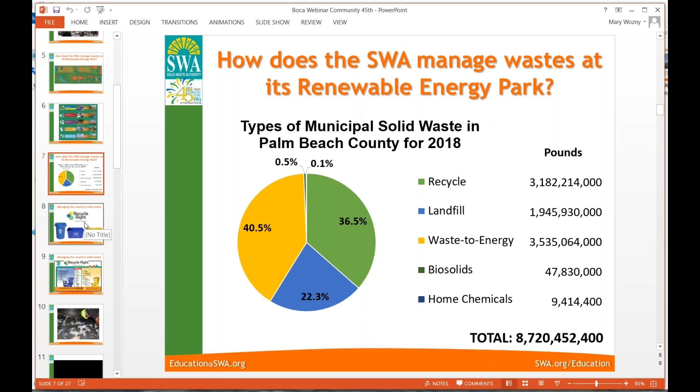So we're going to start by talking about recycling. Recycling is really important, and we have a pretty unique system. I mentioned we're dual stream - that means we have those 2 bins, that blue and yellow bin, and the whole purpose of that is to keep our contamination levels low.

So the blue bin, that's things that might have had food or drink in them, usually those types of containers. And the yellow bin is for your paper material, your cardboard. As a side note, if you guys don't have your blue and yellow bins at home, please give us a call or go to our website and you can request them and we will drop them off for you for free. But now we're going to get into what goes into each bin, because this is where we get a lot of confusion, and a lot of people wish-cycling, where they just put everything into the blue and yellow bins and hope we deal with it. Unfortunately, that doesn't happen. We really need you to recycle right at home to make it more efficient for us and to allow us to do our jobs properly.

So in the blue bin: things like your plastic bottles, your steel cans, your aluminum cans, glass bottles, your cartons - even though like your milk cartons, almond milk cartons, orange juice cartons are cardboard type material, they go into your blue bin because they have that food or liquid in them, and we want to keep our paper clean, not contaminated. So that goes into your blue bin. Drink boxes, not those like Capri Sun pouches, but the little boxes, can go into your blue bin also.

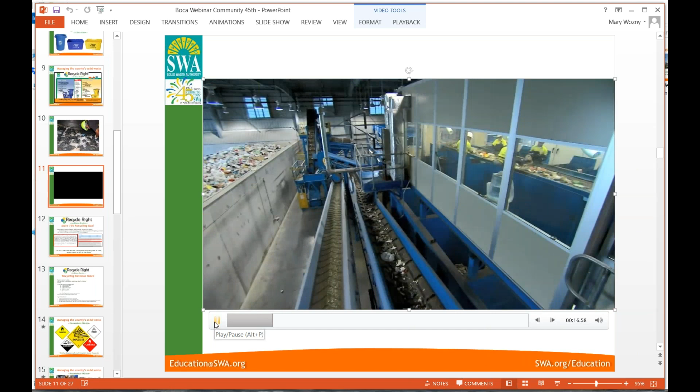So our building is separated into blue and yellow side, just like your bins. We're going to start with the blue side—that's your plastics, your metals, your glass. The first thing we do is pull out ferrous metals, or your steel, with a big magnet. We have people all along the line pulling out contaminants. You can see that again, because lots of people put stuff in their bins that they think is recyclable.

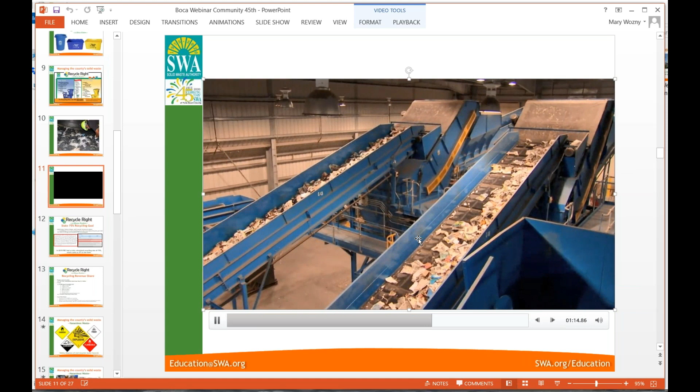On the paper and cardboard side, that's your yellow side, same thing—we have people pulling out contaminants all along the line. The first step we go through is separating the cardboard from paper. It goes across a star screen, and the cardboard dances on top while the paper falls to the bottom. Then we have something called a trommel that will spin out small material we don't want mixed in with the paper that can damage it—stuff like sand, gravel, or little pieces of glass.

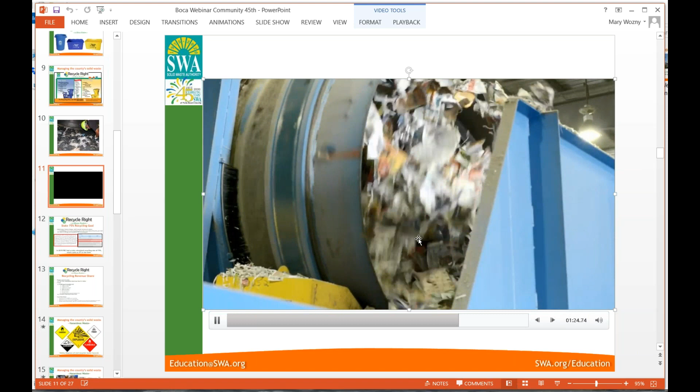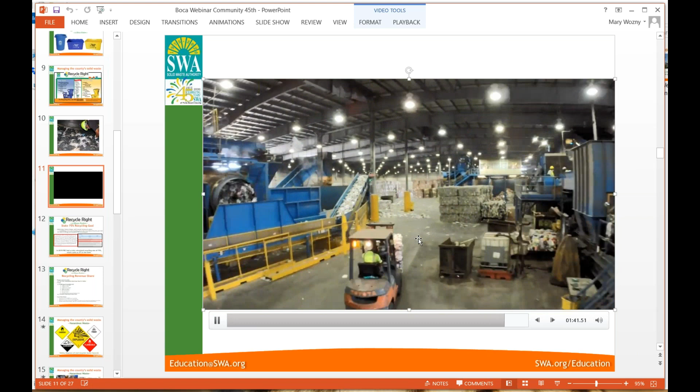We have also seen an increase in the amount of cardboard that we get. That's because it's really easy to shop online—people buy stuff online, it shows up in boxes, and we recycle those boxes. Same thing, we end up creating those bales of your paper or cardboard, wrap them with that steel twine, and then ship them off to be recycled into new materials.

Now, just to give you some more specific information about recycling in Palm Beach County and in the city of Boca. In 2008, the Energy, Climate Change, and Economic Security Act passed, which established a new state recycling goal of 75% to be achieved by this year, by 2020.

Waste to energy is included in that, and we're lucky we have 2 waste to energy facilities, so that increases our calculated recycling rate. As of 2019, Palm Beach County had a state calculated recycling rate of 73%, which is great. It ranks us 4th in the state.

But keep in mind, our population is 1.4 million people, so it's hard to reach that many residents and to calculate that number, because it's not just what we're receiving in our facility, but everything the county is doing. So to get in touch with all those businesses and programs that are recycling to calculate that, it's a really difficult task.

One other program I want to mention is the Municipal Revenue Share Program. The Solid Waste Authority of Palm Beach County started this program in 2010, and since then municipalities around the county have shared more than $9.5 million. The purpose of this program is to reward our municipal partners for the role they play in promoting and supporting our recycling, so the net revenue received from marketing our recyclables, selling them via brokers, is shared with the municipalities after our net processing costs.

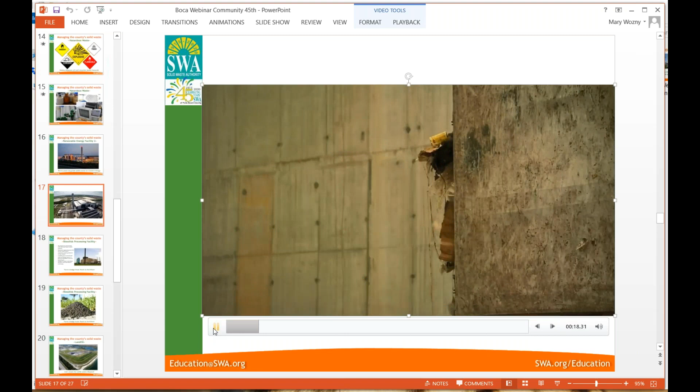First, you'll see those tractor trailers driving up to our tipping floor from the ramp, coming from one of those 6 transfer stations. The truck will push the material out the back via something called a walking floor, so their trucks don't have to tip up, they can just push that material right out into our pit. Our pit can hold up to about a week's worth of Palm Beach County's trash, and the wall on the side where the truck is about 40 feet deep, and across from that is about 100 feet deep. So it's a really large pit of trash.

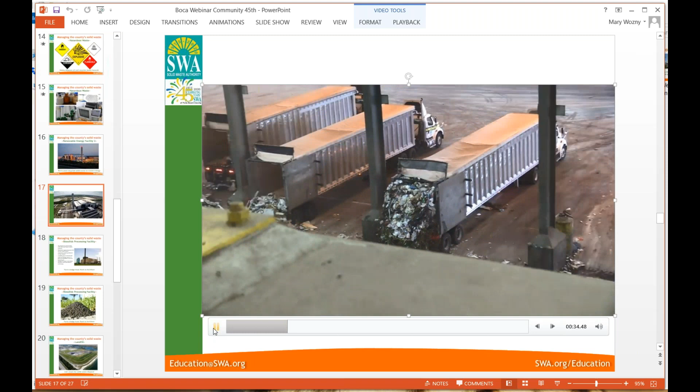In the control room, you'll see one of our claw operators moving one of our claws. We have 3 of them, called grapples, and each claw can hold about 9 tons of trash. Besides the claw operators, we have other engineers there looking at all sorts of data coming in from every point of our power plant, including temperature, pressure, steam, and emissions. The claws are fluffing and mixing the trash, because we want to burn it, and we need a good mix of material in order to do that.

Once they get a good mix, they can hold up to 9 tons of trash. They will move it over to the entrance of our boilers, that's called our hopper. They drop it in very slowly, and that fire burns about 2,500 degrees Fahrenheit.

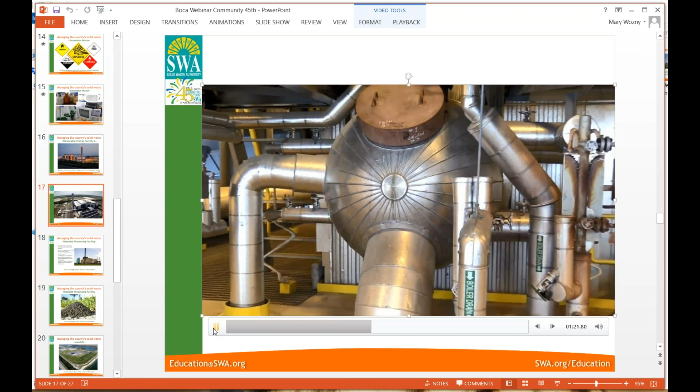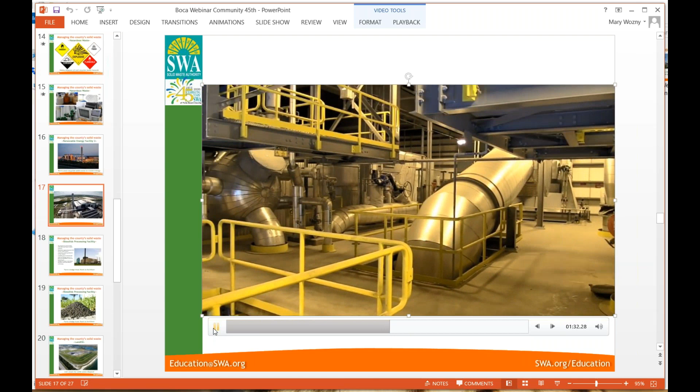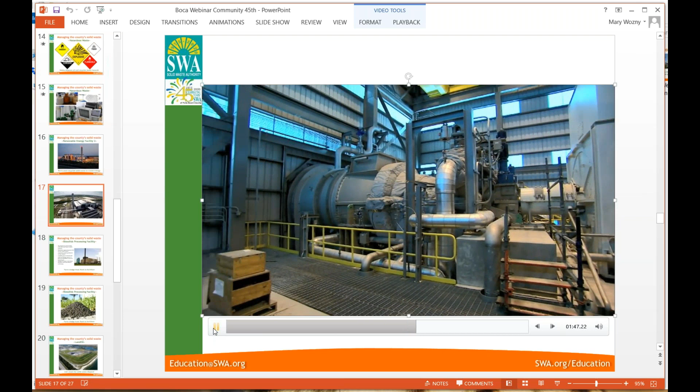The whole purpose is to create steam. Along the walls of the boilers are tubes carrying water, and if it heats up really hot, it turns into steam. That steam gets piped through this networking of pipes into our turbine and generator room. The turbine is the thing to the left that looks like a jet engine, and the blades spin through a rotor into our generator, where we produce enough electricity to power about 70 to 75,000 homes, in addition to all of our facilities on Jog Road.

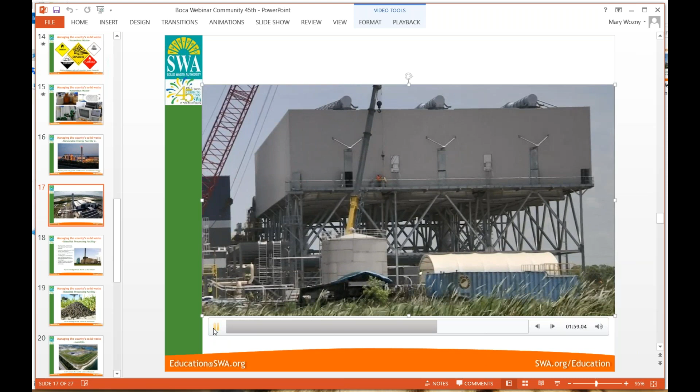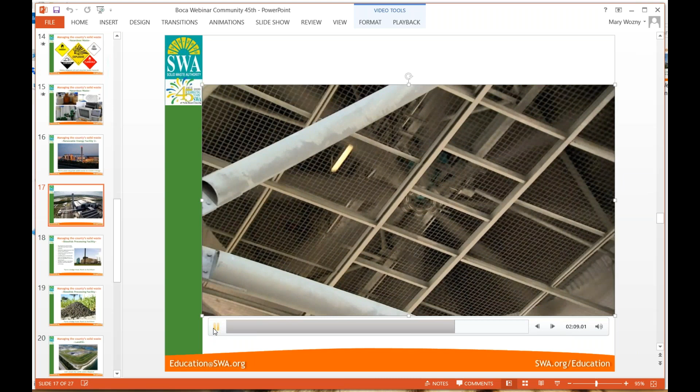Now what you're looking at is the ACC, our air-cooled condenser. We are the greenest facility, so we don't want to waste anything, including steam. So the steam we use to turn the blades in the turbine, we pass over these fans. We have 15 of them, and they're 36 feet across. This cools the steam down back into water, which we can pump right back into our facilities.

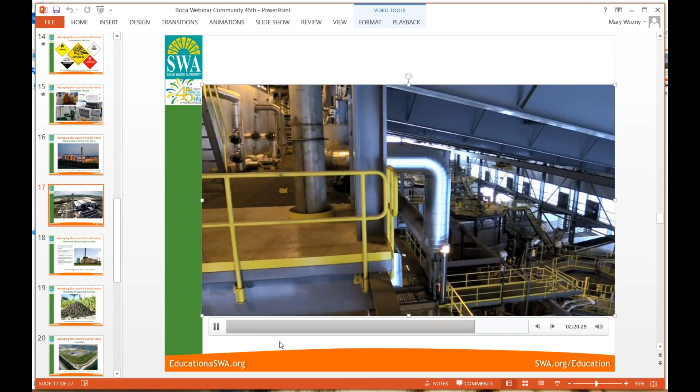Air pollution is another thing you should be really concerned about. This gives you a good view of our air pollution control systems. We have 4 main things we do. The first is we inject something called powder activated carbon into the flue gas, which is what's coming off your fire. That powder activated carbon neutralizes our mercury.

The second thing is located in those big cylinder-like things you can see on the screen. Those are called dry scrubbers. We inject a lime slurry, which neutralizes sulfur oxides. For anybody who's not a chemist, sulfur oxides are the main component in acid rain, so you don't want us releasing that into the atmosphere.

Next we have a series of baghouse filters. If you've ever sat around a campfire or lit a candle and seen that smoke coming off, that smoke is caused by particulate matter. Since we're burning 3,000 tons of trash in this facility every day, you don't want that particulate matter entering our atmosphere. So we collect it in the baghouse filters and dispose of it.

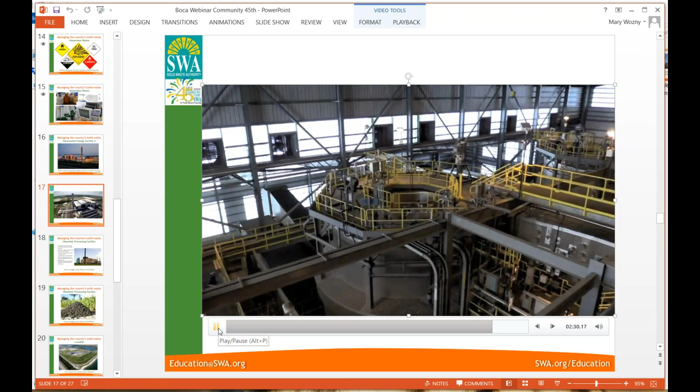The last thing we have is called a selective catalytic reduction system, which nobody else in North America has. It's how we take out our nitric oxides, which, for the non-chemists out there, is the main component in smog. If you've ever seen that thin layer of yellowness over pictures of LA or New York City, that's what you don't want us releasing, caused by those nitric oxides.

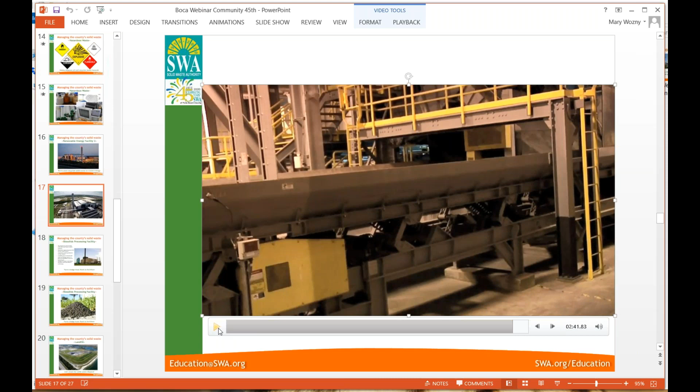The last part here is the ash. Ash gets sent over to our ash management building, because you'll see there are some big pieces in there. Those are things like metals that aren't going to burn, but we still want to recycle them because they're metals and good to be recycled. So they go over to ash management, the metals get pulled out and we recycle those, and then the ash gets sent over to our landfill.

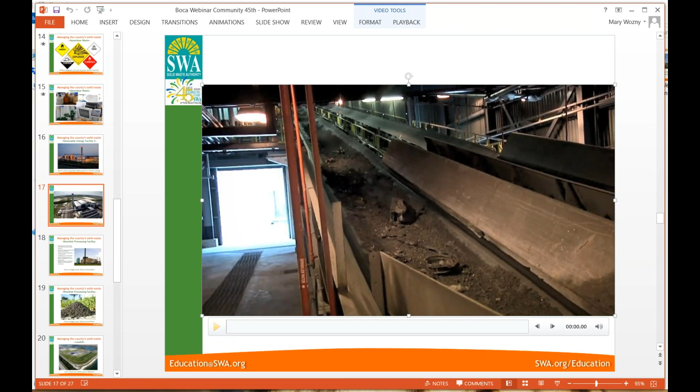Now, moving on to our biosolids pelletizer. This is always a fun one to talk about. This is where we deal with that flush. So when you flush a toilet in Palm Beach County, it goes to a wastewater treatment plant. They take out all of that liquid material and send us the solids. We get about 600 wet tons of sludge a day.

The last resort that we have for all the waste in Palm Beach County is our landfill. We have 2 landfills, and that word 'dump' is really a bad word for us. Ours are not considered dumps. A dump is basically a hole in the ground where people throw trash. Ours is a clean sanitary landfill.

Another thing we have is this piping system called a leachate collection system. Leachate is one of those scientific words for garbage juice, basically. If you've ever taken out your trash and walked down the driveway and stuff starts leaking all over the place, that's garbage juice. You don't want that getting into your groundwater, so we pipe that off, treat it, and dispose of it separately.